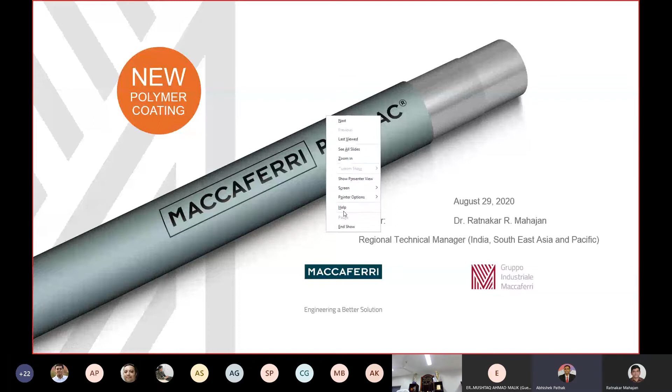To achieve the technical performance demanded by hydraulic, geotechnical, erosion control, and environmental protection projects, PoliMac maximizes the longevity and efficiency of the product through its enhanced mechanical performance and increased chemical resistance. So today we are going to discuss PoliMac, a new polymer coating that exhibits excellent adhesion to the wire and outstanding abrasion resistance. Extensive tests have been carried out on the new polymer coating and results prove that it can withstand the most severe applications, including aggressive mechanical and chemical environments and long-term UV radiation. So this is, briefly, what I wanted to explain about PoliMac.

Thank you so much. Over to Doctor to take you into more detail about this new coating from Maccaferri. Thank you. Thank you, Abhishek ji. So let's begin with today's topic, a new polymer coating, that's PoliMac.

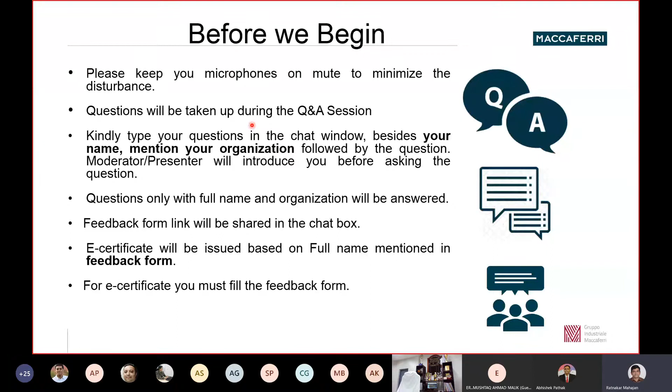So to begin, Maccaferri is a worldwide, global organization, around 140 years young, present in almost 100 countries all around the world, with 30 manufacturing facilities spread over 70 subsidiaries. We have our global headquarters at Bologna, in Italy, and in India we started our operations in the year 1998, and our corporate office is based in Gurgaon. We have two manufacturing facilities in India for this product we are discussing. One facility is located in Ranjangaon, near Pune, and another facility is located at Una, in Himachal Pradesh. Before Maccaferri entered India, gabions were not that much accepted, but Maccaferri invented gabions around 140 years back, and it changed the complete engineering landscape.

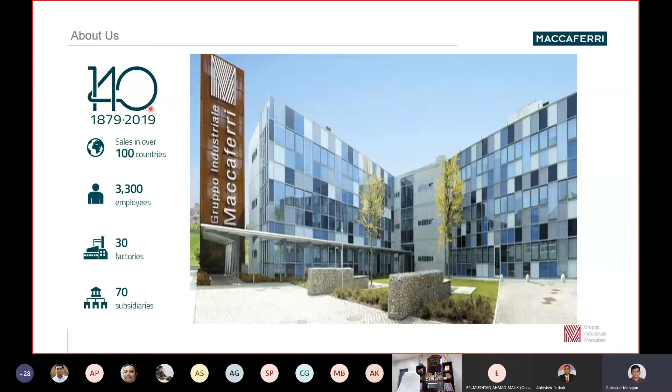And when Maccaferri entered the Indian subcontinent, the acceptability of gabions changed. So the world is changing, and the environmental conditions are getting worse day by day. The frequency and severity of exposure is increasing. The technical characteristics of engineering materials must respond to the needs of a changing world.

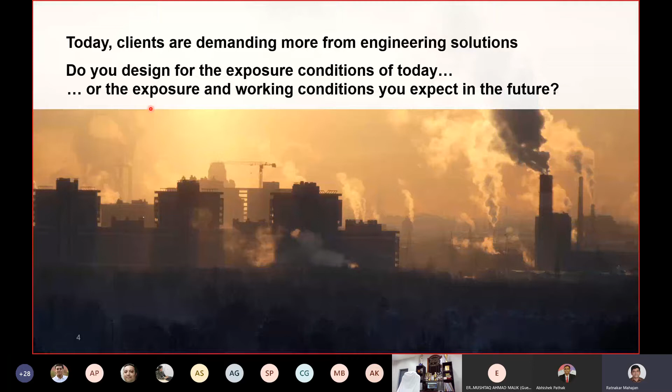Indeed, today we need to consider that the exposure and the working conditions will be worse over the next few decades. The question comes, have we considered this within our design? That is one question that we need to answer. And of course, in order to achieve an adequately durable structure, the expected environmental conditions should be taken into account. This is also mentioned in the European standard related to construction, that is Eurocode 0, basis of structural design.

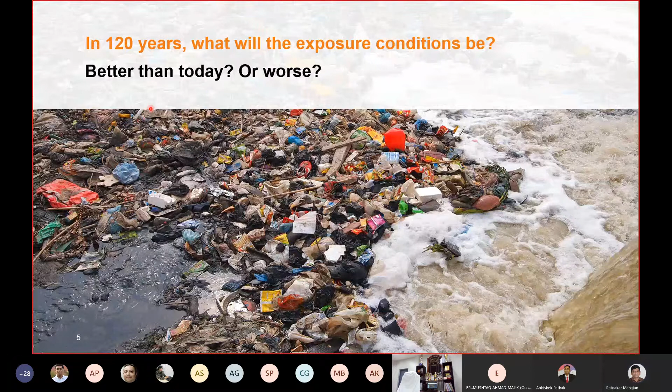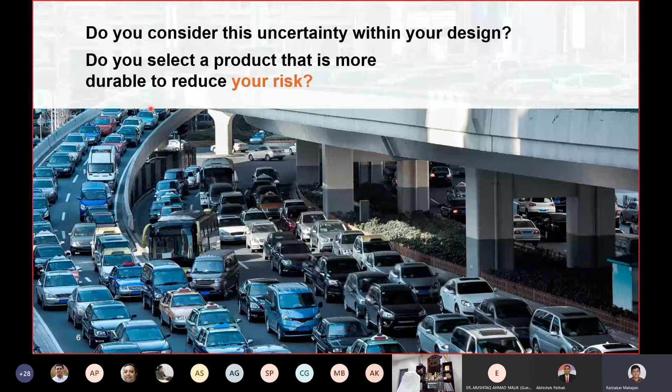So the uncertainty in your design, whether it is being considered, whether whatever product you select is durable or not, and whether you reduce the risk of this product failing prematurely, needs to be understood. The market and the clients are demanding greater resilience, better performance, and I would say more value than ever before. So there is an increasing need for more robust solutions to address the worsening climate and the operating conditions faced by civil engineering materials. So this is what is being required.

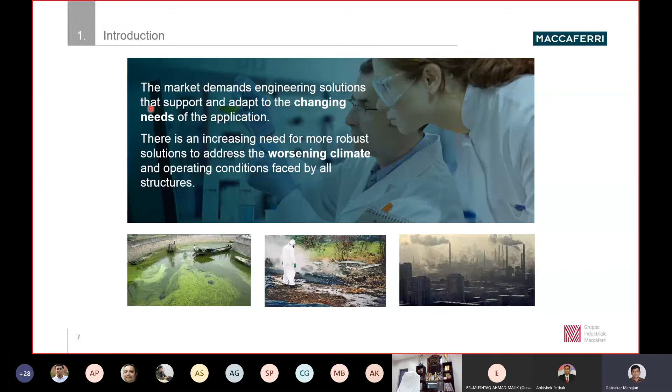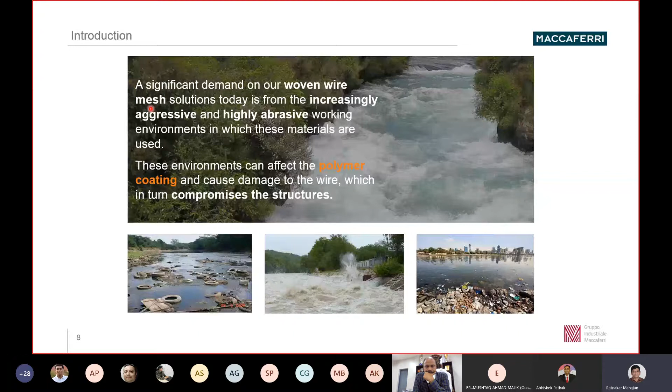So of course, a significant demand for our double twisted wire mesh is basically in increasingly aggressive and highly abrasive working environments. The environments of a few years back were different from today; it is more aggressive today. These environments can affect the polymer coatings and cause damage to the wire, which in turn compromises the structure. So the environmental changes pose a new challenge, and that's why these polymer coatings are applied on steel products.

Usually, when polymer coatings are exposed to intense UV rays, embrittlement is caused, and there is a reduction in mechanical properties over time. Loss of the polymer coating due to abrasion makes these coatings no longer effective, and the steel wire beneath will be exposed to accelerated conditions. So to respond to the more severe exposure conditions expected over the next decades, there is an increasing demand for polymer coated products that can be effective

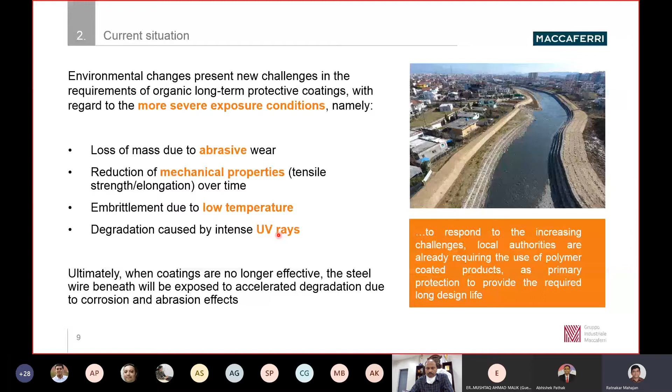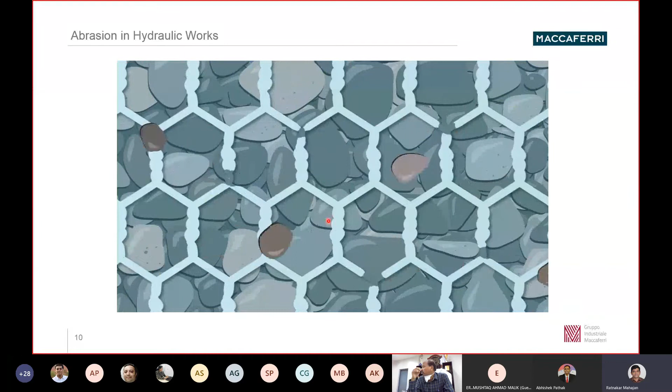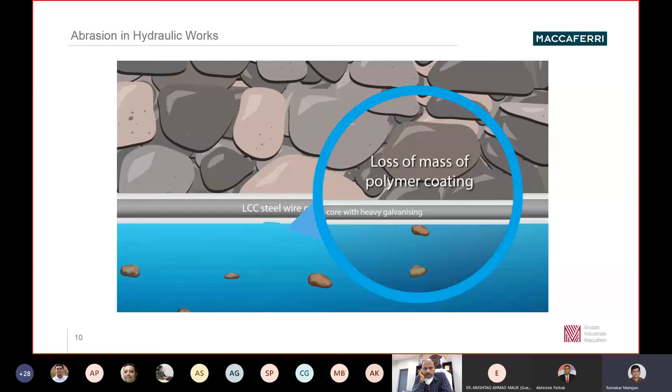in such worse conditions. So this is one animation to show what exactly we are talking about. As a consequence of climate change, more abundant and frequent rainfalls are causing an increase in turbulence, such events and more floods. Indeed, climate change can also play a role in sediment transport, as it affects both timing and magnitude. The sediment transport will of course have some effect on the steel wire mesh products applied in hydraulic structures.

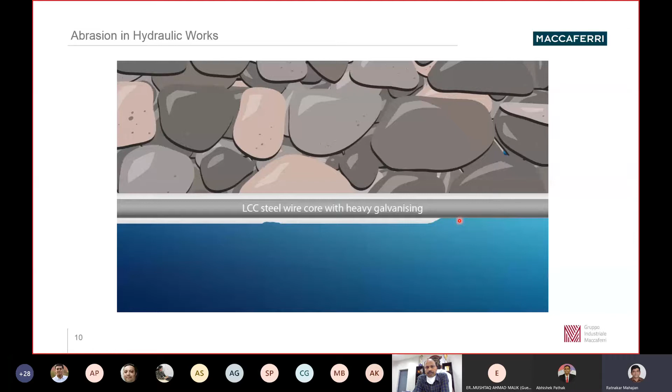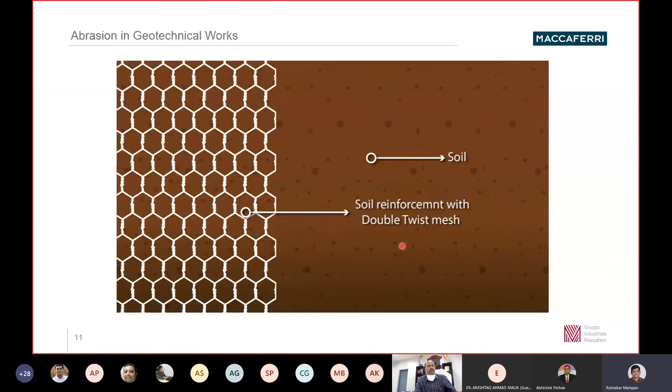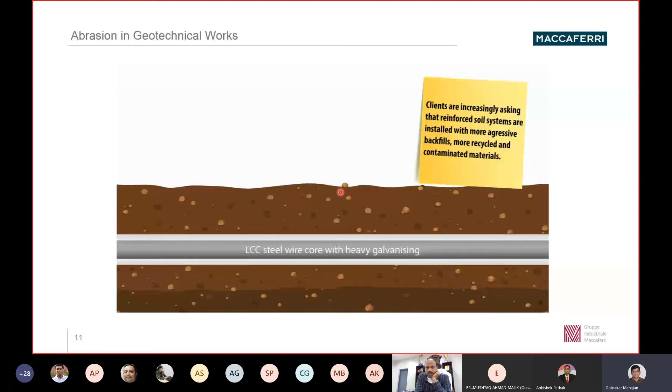A similar condition is possible in geotechnical works, when we use this double twisted hexagonal wire mesh as soil reinforcement. There will be unexpected worsening conditions during installation. When you put the fill over this mesh, there can possibly be damage to the coatings. The operating conditions are always more demanding and require more resistant material.

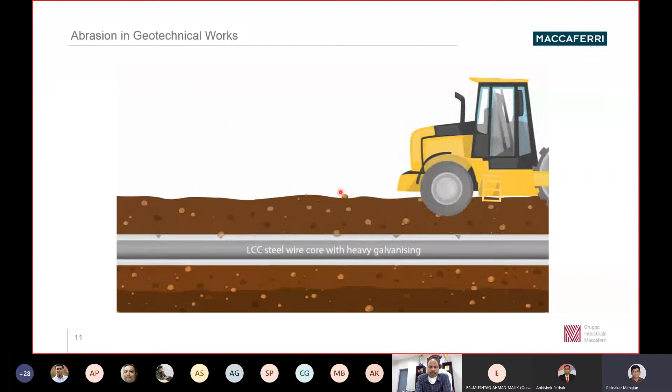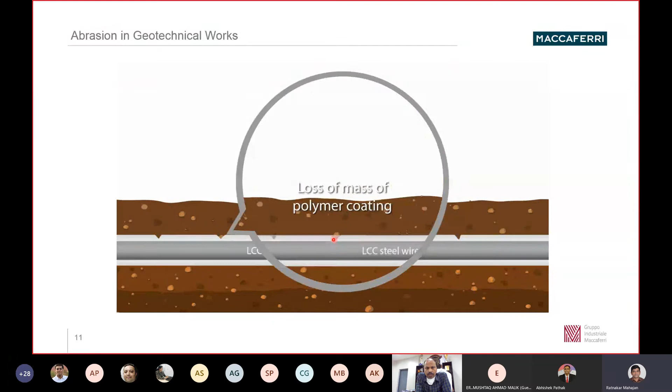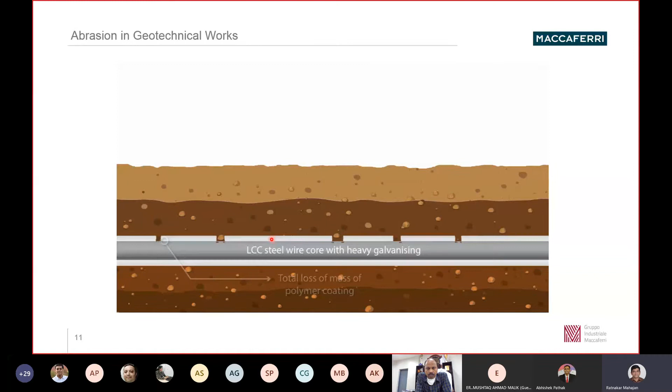So when you install a granular layer on this mesh as soil reinforcement, with the soil taken as structural fill, and you compact it with the surcharge load, if the polymer coating is not strong enough, there may be damage to the polymeric coating. And as you build the structure, these effects can worsen and damage this coating partially or completely. So there is a need to find a solution for these kinds of conditions.

Apart from that, construction materials are more often exposed to aggressive chemicals, which demand more challenging durability and performance. For instance, the exponential growth of urbanization has caused an increase in atmospheric pollution. As a blessing in disguise, we saw at the beginning of the COVID lockdown that the overall pollution in the country came down, and people shared photographs from the Punjab area sighting the Himalayan peaks.

People in metros were feeling the air is cleaner. Like I am now based in Gurgaon, so actually the air was cleaner. Due to urbanization, there is a lot of pollution happening, and of course there are some events such as acid rains, soil contamination, industrial waste and other effluent sources. They can also enter water sources through runoff over contaminated soil, maybe mine waste, landfill, various sources from which these chemicals can come out.

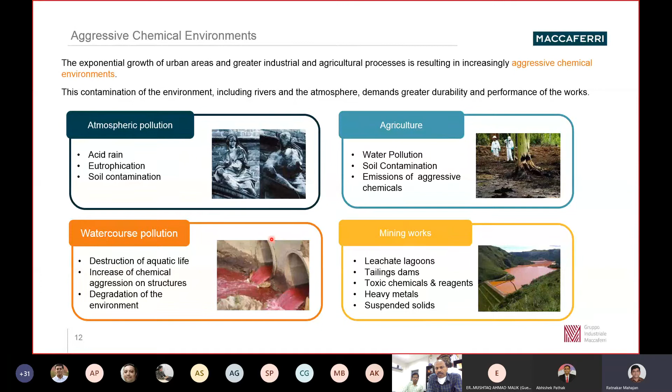So there is a demand of material which can fulfill these things. In view of this, we have come up to respond to this changing world. We have developed PoliMac, a new polymer coating specifically used for our double twisted hexagonal wire mesh product, that can achieve the technical performance for hydraulic as well as geotechnical, environmental and erosion control projects. It can offer more value than ever before.

PoliMac maximizes the longevity and efficiency of the product through its enhanced mechanical performance and increased chemical resistance. This product, we have kept in mind while developing, has to be environmental friendly. So it is free from heavy metals, and the product is really environmental friendly.

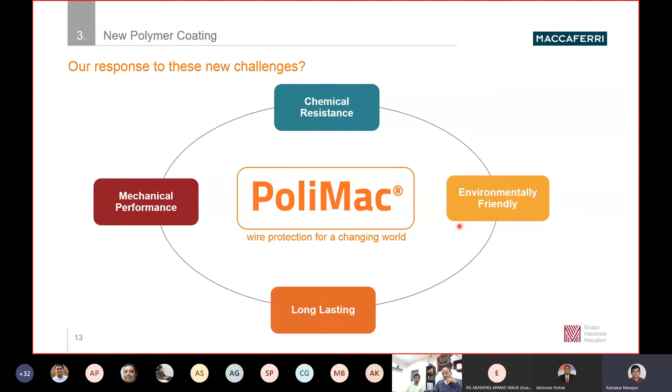Now let's look at these various aspects in detail. PoliMac is a new polymer coating which exhibits excellent adhesion to the steel wire and outstanding abrasion resistance. Extensive tests have been carried out on this new polymer coating, and the results prove that PoliMac can withstand the most severe application conditions, including aggressive mechanical and chemical environments and chemical or mechanical impacts.

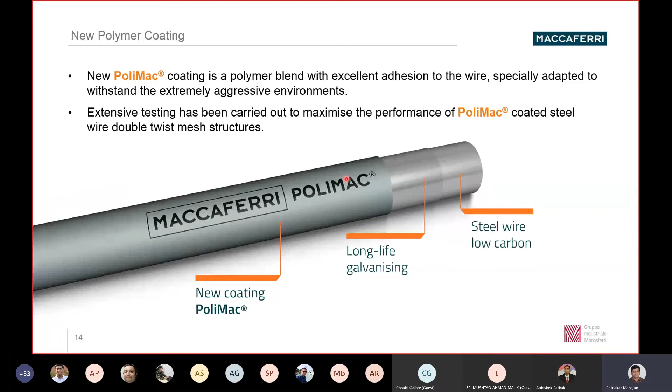Also the long-term UV radiation. Usually our double twisted wire mesh products have a base product that is a steel wire, which is coated with the metallic coating, usually zinc aluminum alloy. On top of that, a polymeric coating is being placed.

Maccaferri patented the first gabions at the end of the 19th century, and since then Maccaferri has developed metallic coatings and plastic advanced coatings to maximize the longevity. PoliMac is the most advanced and resistant coating which can face the challenges of the changing world.

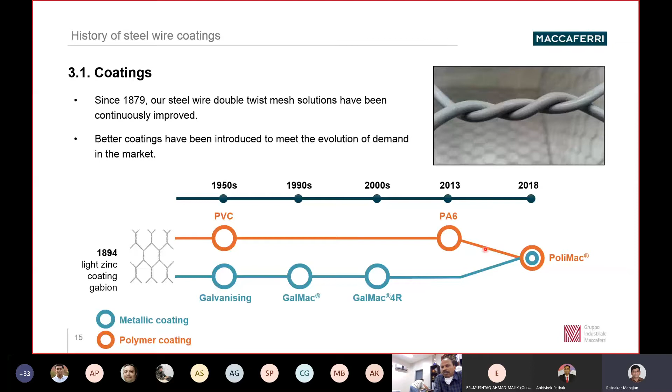You can see the evolution from the 1950s to 2018. Earlier it was just galvanization, but then we put the polymer coating, PVC, and then galvanization. Galvanization metallic coating has been improved with additional resistance, then moved to PA6, and now we are talking of PoliMac, which is far better coating compared to the past ones.

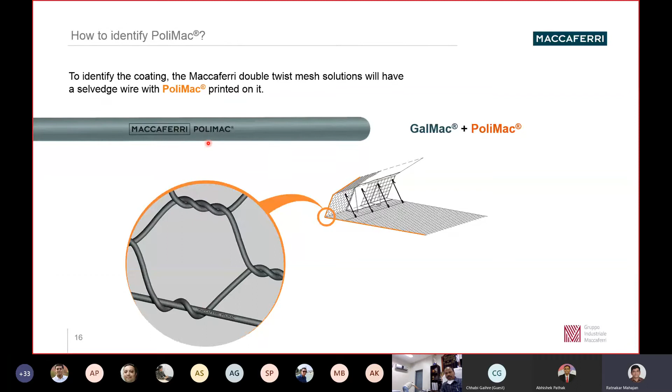PoliMac products will have an identification on the selvage wire. So let's say you have this product called Green Terramesh. On the edge, we will have an edge wire on which the polymer can be easily identified. Just to give an example, on a Gabion, on the edges we will have this printed, on Green Terramesh, on mesh and netting rolls at the edges, on Reno mattress at the edges, sack Gabion where the closing of the Gabion or the Terramesh is at the edge. So all these products, this PoliMac coating will be used to withstand more severe application conditions.

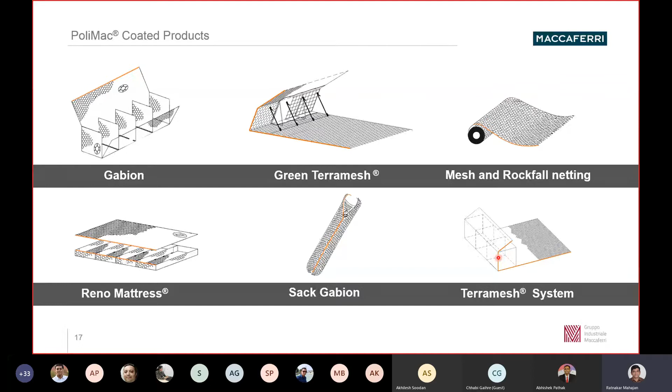Working with our innovation center, which is based in Italy, we refer to it as the Maccaferri Innovation Center, PoliMac has been developed through extensive testing, which complies with international normatives like EN 10223 Part 3 as well as EN 10245 Part 3, and also new standards like IS 16014 cover these requirements. So our product meets both local as well as international standards.

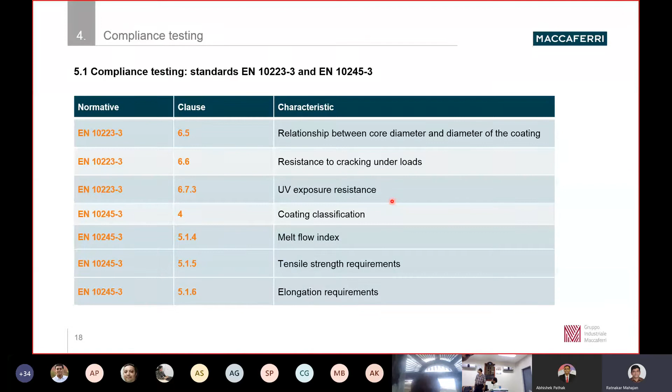The standards give the relation between what shall be the diameter of coating compared to the diameter of wire, what shall be the requirements of this coating for UV resistance, classification of coating, tensile strength, and so forth. The EN 10223 Part 3 provides no guidance on abrasion.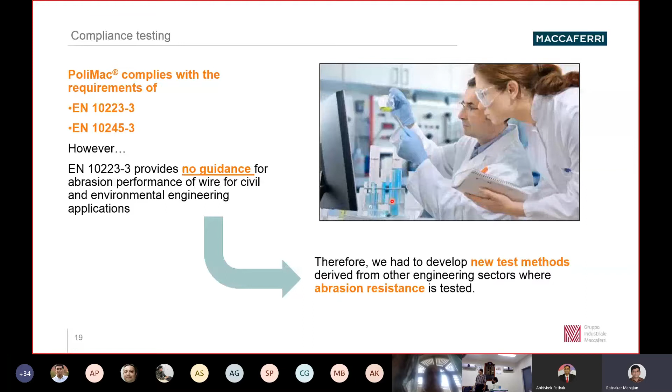Therefore, we had developed a new test method from other engineering sectors where abrasion resistance is tested. In particular, this new test method is taken from EN 60229, and PoliMac is presenting the 5 pillars, I would say, of abrasion resistance. As I mentioned, though the EN standard doesn't mention abrasion, we have derived it from other engineering sectors: resistance to low temperature, UV resistance, resistance to installation damage, and chemical resistance.

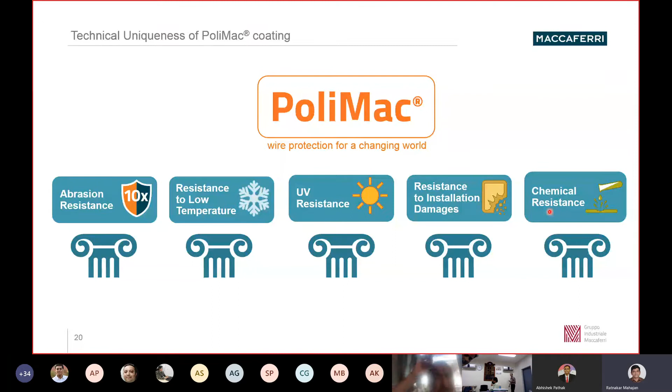PoliMac's mechanical and chemical properties enable its use in the most aggressive conditions. Let's look at all these 5 pillars one by one. First is about the abrasion resistance.

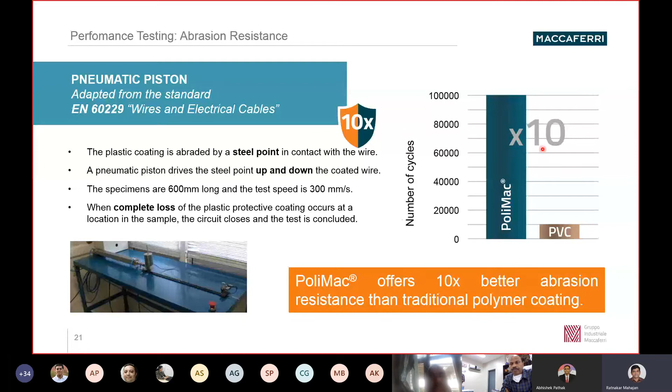Tests carried out on the PVC coated wire and PoliMac, when we do a test as per EN 60229, we found that the PVC could offer some resistance, but PoliMac is offering roughly 10 times higher resistance. This is, I would say, having 10 times better abrasion resistance than the traditional polymer coating, which is usually PVC.

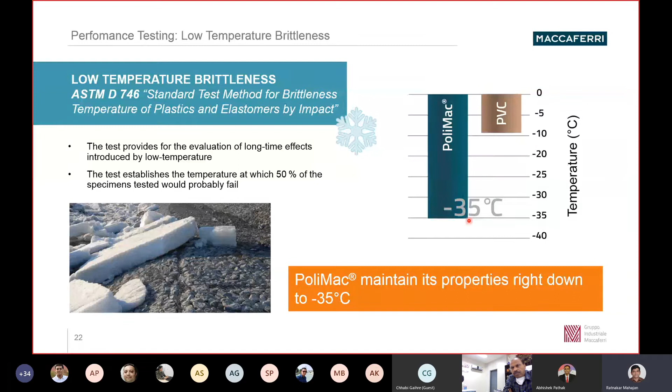PoliMac maintains its properties when subjected to lower temperatures. Usually at lower temperature brittleness comes into picture, but the ability of PoliMac to maintain its properties at such low temperatures is, I would say, better compared to PVC. Usually PVC can maintain its properties up to minus 9 degrees centigrade, whereas PoliMac can go down to minus 35 degrees centigrade. So this would be relevant for rockfall applications in cold areas, or where freezing conditions exist in hydraulic applications, which could be in the Himalayas. The product would be suited there.

Another aspect is UV resistance. After UV exposure, usually PoliMac retains higher tensile strength compared to PVC. This makes PoliMac very suitable not only for low temperature or cold areas, but also for high temperature, typically arid or desert conditions. In India, we have many parts of the country which can be subjected to these kinds of conditions.

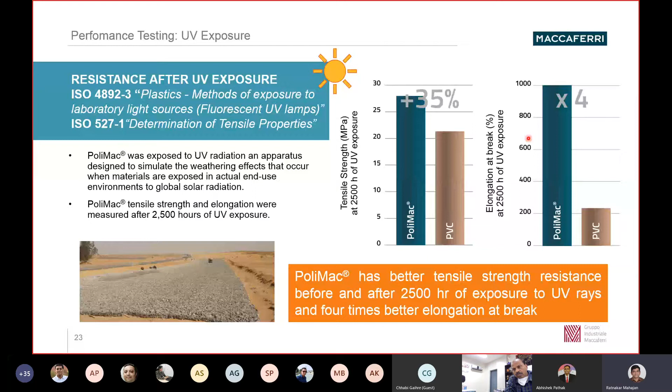When you talk of cold conditions, all along the Himalayas, from the northeast to the north part of the country up to Jammu and Kashmir, and even up to Nepal or Bhutan, that area can easily be covered with this product. PoliMac retains better tensile strength even after 2500 hours of UV exposure. It also has better elongation at break compared to PVC, roughly 4 times higher, so it still remains an elongating product, not a brittle one.

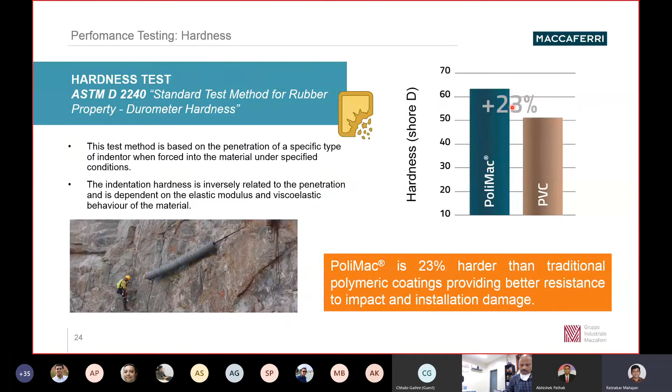Moving forward to hardness, PoliMac is roughly 23% harder than PVC, which provides better resistance to impact damages. Where is the relevance of impact damage? For example, when using PoliMac products for filling gabions with stones, there are possibilities of impact from stones on the mesh, or in rockfall applications where falling rocks can hit the mesh. PoliMac is harder than traditional polymer coatings, and this enhances its performance and durability, being roughly 23% harder than traditional polymeric coating.

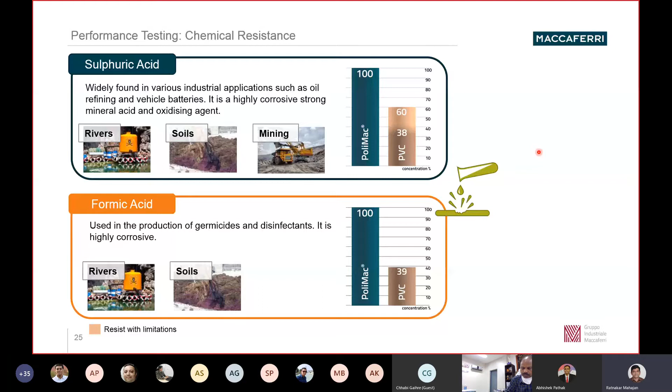Moving to chemical resistance, this polymer coating is more resistant to chemical attack than traditional polymer coatings. This chemical aggression can be encountered in mining, hydraulic, or geotechnical works. Many times contaminants come from industrial activities or agriculture, such as germicides and disinfectants that are spread and can get in contact with water and transfer to the structure. The resistance of PoliMac is better for various kinds of chemicals, and it should be used in highly aggressive environments due to its excellent chemical resistance characteristics.

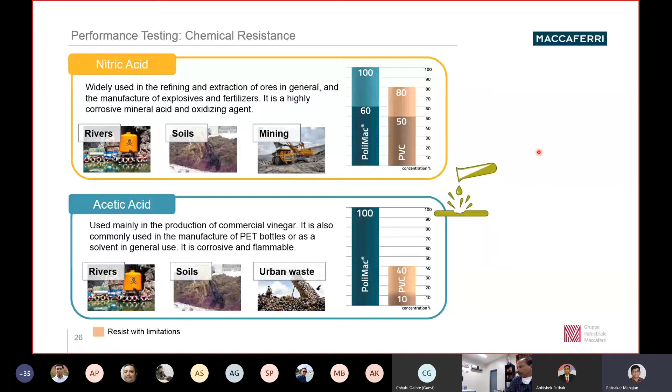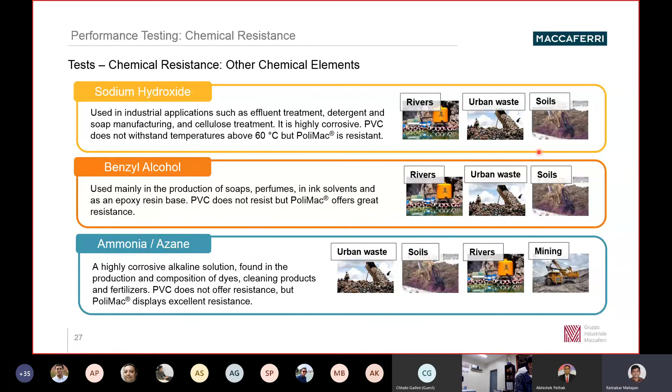Test results show that in many instances PVC cannot resist chemical aggression, but PoliMac resists perfectly against chemicals like ammonia, benzyl alcohol and many others. So when chemical aggression is an issue, the presence of resistant coating is essential to protect the basic steel wire from rapid corrosion so that durability can be ensured. These products are recommended for use in hydraulic, mining, infrastructural and environmental works, and are more suited for abrasive or chemically aggressive environments, low temperatures, or areas where UV radiation is higher.

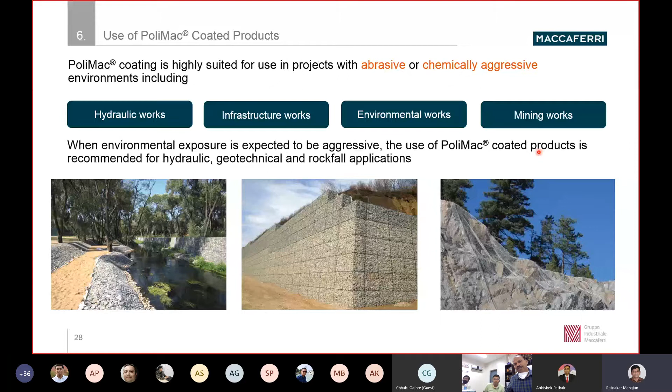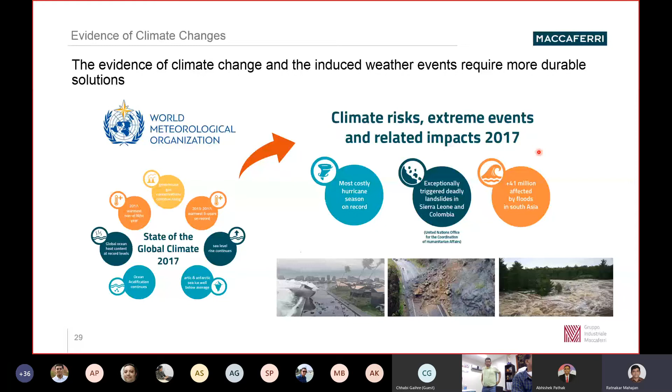The World Meteorological Organization statement in 2017 on the state of global climate mentioned that ongoing climate changes affect the intensity and frequency of extreme events. We have seen floods becoming common, the number of landslides increasing, and changes in sea levels, among many other things. This results in more aggressive exposure conditions for civil engineering structures.

So PoliMac has been developed to meet these challenges, and this new coating can be extruded on a thicker wire. Typically the traditional polymeric coating has some limitation to be extruded on thicker wire, but even this PoliMac can be extruded on thicker wire, enabling the production of new combinations of DT wire meshes.

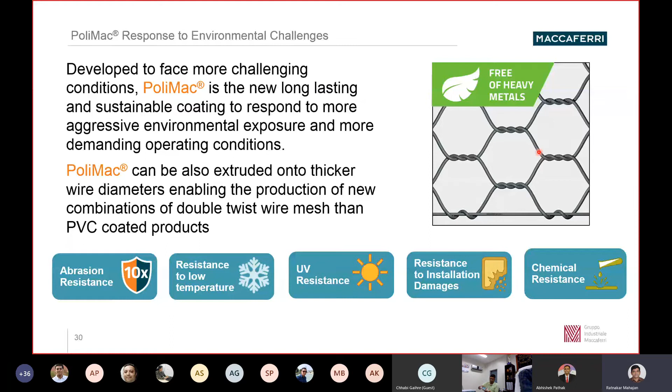So that is possible, and the coating is free from heavy metals. That's how it becomes environmental friendly. The international standards already require taking into account the environmental working conditions.

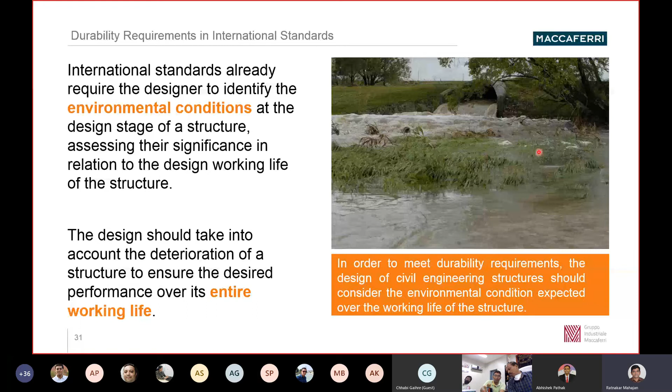Eurocode is the European standard specifying how structural design should be conducted within the European Union, where it is mentioned that environmental working conditions for the structure shall be taken into consideration while designing. Section 2.3 and 2.4 of Eurocode 0 highlight the need to take into account the expected environmental conditions. The designer should consider that climate change will make the environmental exposure more aggressive over the next few decades.

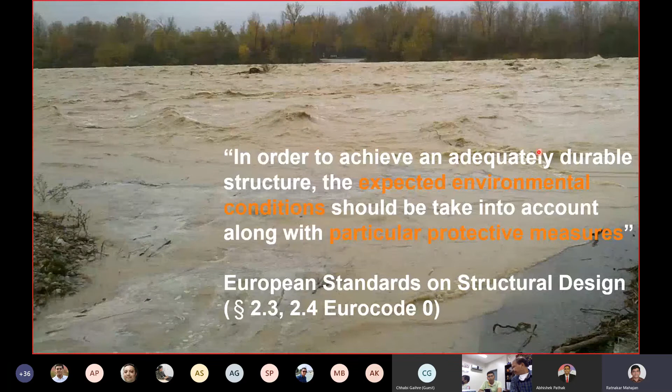So with the PoliMac, you can have a variety of structures like bank revetment, whether it could be a small stream, nala, or a major river. It could be in urban areas where you want to have surface runoff drains protected.

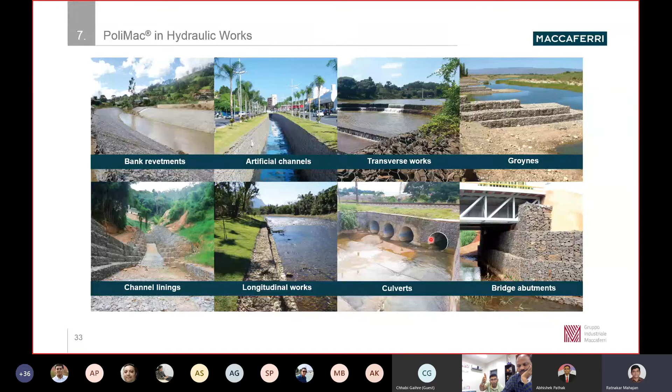It could be transverse structures in the river, groins for training of the rivers, channel linings to protect the banks as well as the bed of the channels, like bank protection, or even cross drainage works like culverts, where you can have head walls, wing walls with this product, or even bridge abutments that can also be protected.

In addition, it can be used for reinforced soil structures, for example soil reinforcement with the Terramesh system, or mass gravity structures like gabion walls, or simple retaining structures used in urban areas. It can also be used for reinforced slopes or erosion control.

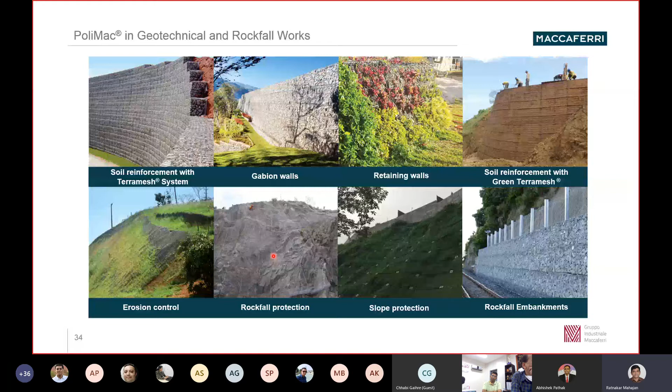You can combine this PoliMac mesh with the synthetic mat to protect the slope from erosion. It can be used for rockfall protection—our hexagonal mesh is used to form basic mesh, which is further strengthened with incorporation of steel wire ropes. So in that also the PoliMac coating can be used, for slope protection or rockfall embankments.

Overall, PoliMac is a new coating designed for a changing world, and that's what we want to offer as a value addition to the industry, to the world, for a changing world with a sustainable environment.

With this, I would like to thank you very much for connecting today with us, for understanding our new polymeric coating.